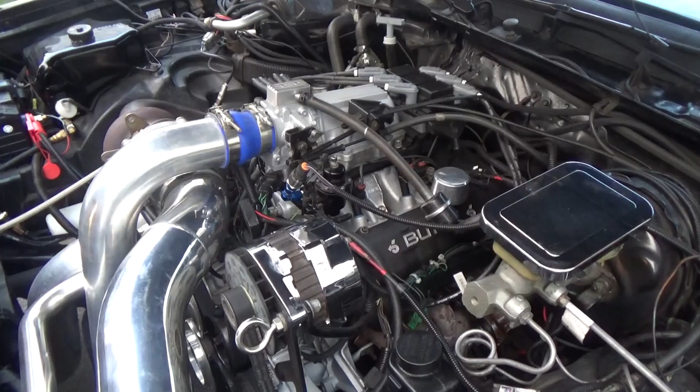Okay guys, we're back. I posted a video two weeks ago and we had a few issues at the track that night.

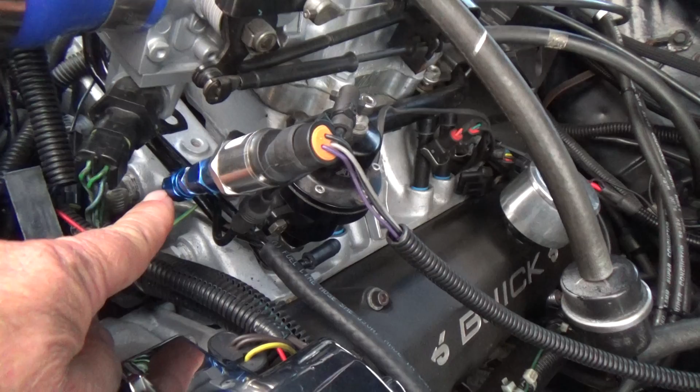First off, this fuel fitting was leaking, so we ordered a new one. It's on, that's all good.

We popped an ignition module that night as well. There's a new ignition module on it. I actually have a video up about that one as well.

All good there. We had a high BLM count on the ScanMaster, which is a block learning multiplier. It's your long-term fueling. This car normally at idle runs at 118. It jumped to 128.

We were figuring it either had a vacuum leak or an exhaust leak, so we went and put all new vacuum lines on it everywhere. BLM stayed at 128. It refused to come down to 118 where it normally runs at idle.

Steve Wood, who has forgotten more about these cars than I'll ever learn, recommended that I try swapping out the O2 sensor, because the O2 sensor reports back to the ECM, and then the ECM sets your fueling.

Now, what head faked me on this was, and I put a video up months ago about this, was if the O2 count starts slowing down on your ScanMaster, your O2 is on its way out. This one, the numbers were running fine on it. They were moving around fast, the whole nine yards.

So anyway, had a couple of Denso O2 sensors sitting around, swapped one out and let the car come up to temperature, and sure enough, the BLMs dropped back down to 118 where they're supposed to be. So we went out last night testing the car.

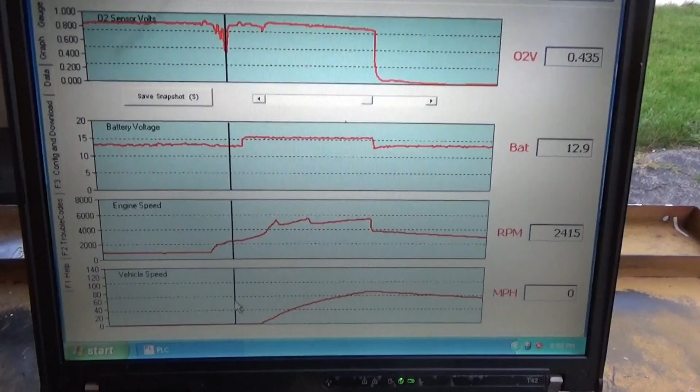But I'm going to show you the file from the third run I did on Powerlogger here. So what we have here is the top graph is your O2 sensor volts, and I'm spooling the car up. The second one down is battery voltage. It's okay at 12.9.

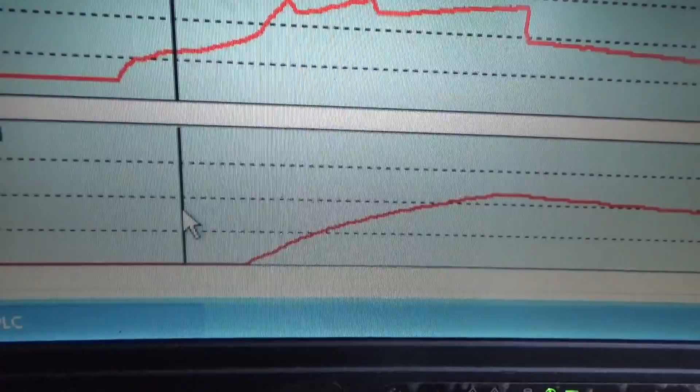Now you can see spooling the car up, the O2s fell off for some reason, spooling it up before I left the line. You can see the engine speed there, and I've got a line all the way down to it. And the bottom one is vehicle speed, so I haven't started moving yet, I'm just spooling the car up. So there's the engine speed, the second one up.

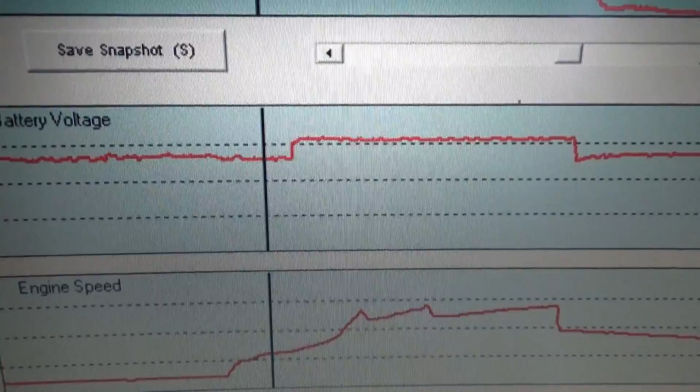Third one is battery volts. Thought maybe the volts dropped off. They didn't. But as you can see here, spooling the car up, something's going on with the fueling, and it dropped out while it was spooling. Don't know why. Now it stayed steady for the run.

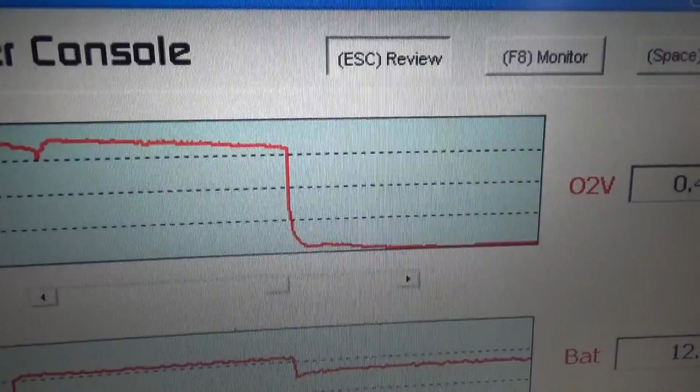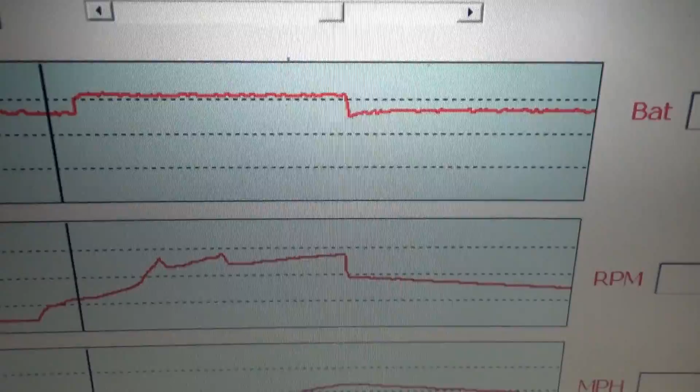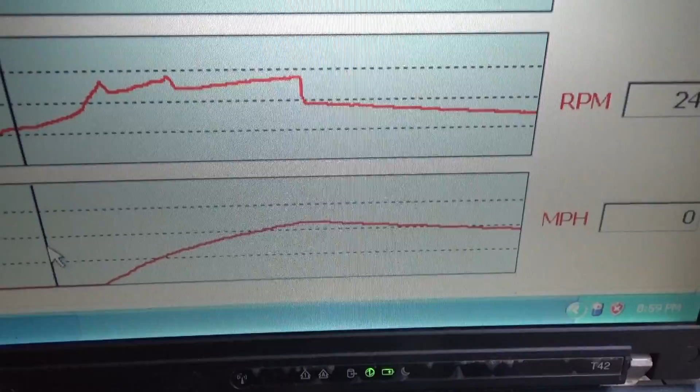There's high gear. Well, I had it wide open throttle in high gear, and you come down here, you can see where it dropped into third gear and went along. The O2 volt stays steady, but like I said, it was 802 at the end of the run, which is too lean with that much fuel thrown at it. It should have been blowing black smoke all the way down the track, and it's 802 now. There's something up, so we're going to change the fuel pump this week.

I stopped by and grabbed a fuel filter for it today. I changed it a year ago, but we'll swap the fuel filter out anyway. They're cheap, they're $7. And since we're going to be changing the fuel pump out one day this week, I'll make a video, and I'm ordering the fuel pump out of Racetronix out of Toronto.